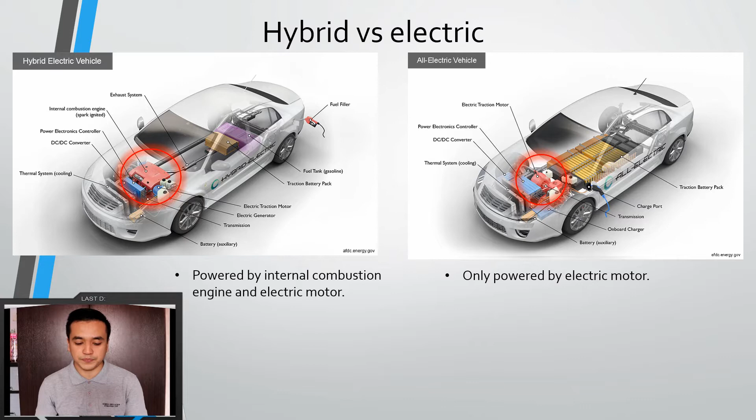So the first difference is that hybrid vehicles are powered by an internal combustion engine and electric motor, while electric vehicles, also known as EV, are only powered by an electric motor, except that the motor of electric vehicles is bigger.

Next thing you may notice is the battery packs. The battery packs of electric vehicles are much bigger compared to the battery packs of hybrid vehicles. These battery packs supply electric power to the electric motor. What's interesting about these battery packs is that the inside contains those similar AA batteries, and there are many of them inside.

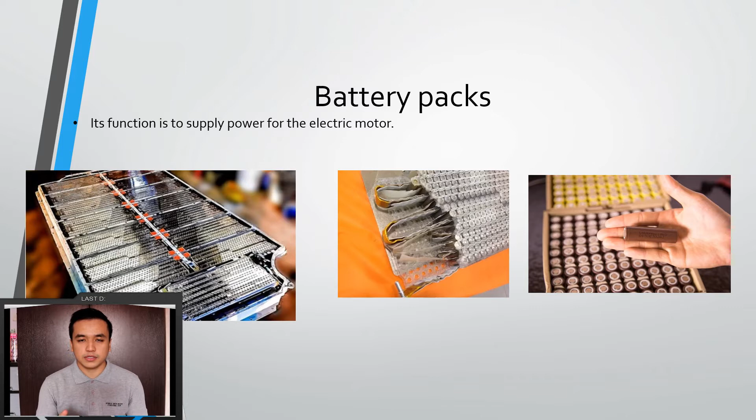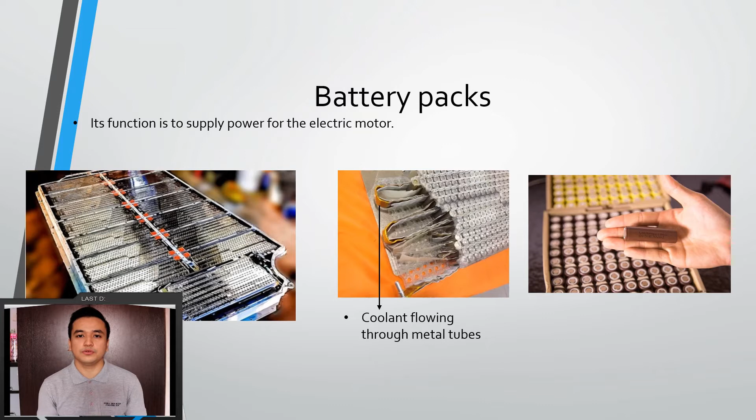This is due to the fact that it needs better cooling. When the electric motor needs power from the battery packs, it generates lots of heat. Therefore, these batteries are smaller for efficient cooling. They are organized in rows, and in between them there is a metal tube for coolant to pass through. This is to cool down the battery each time it generates heat.

So back to the slide. The third thing you may notice is that hybrid vehicles don't have a charging port, which may make you wonder how hybrid vehicles gain power. Well, it gains power by regenerative braking. I will explain that in more detail later. Electric vehicles have a charging port, so they charge the battery directly from the charging port.

And the last thing you may notice is that hybrid vehicles have a fuel filler, while electric vehicles, because they don't have an internal combustion engine, don't need any fuel. At the same time, hybrid vehicles do have exhaust, and electric vehicles do not have exhaust, because there is no internal combustion engine.

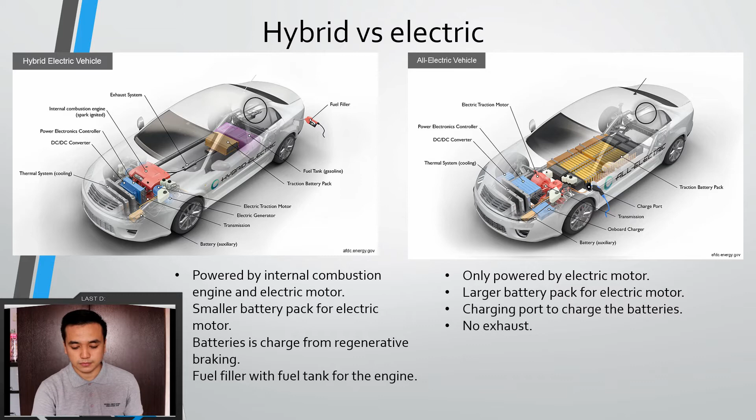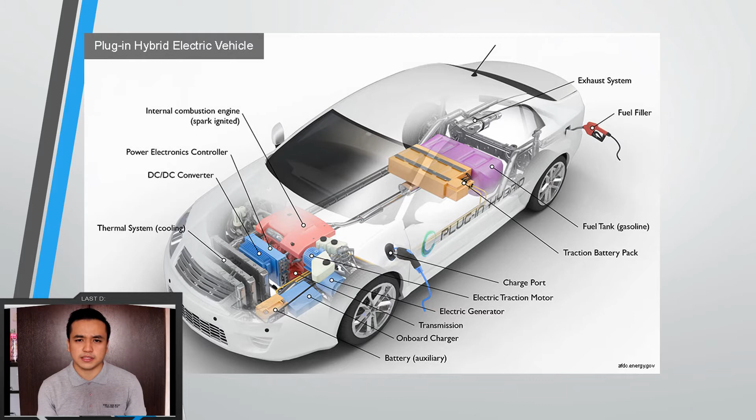So next, I forgot to mention plug-in hybrid vehicles. There are also plug-in hybrid vehicles which are similar to hybrid vehicles, only that they have a charging port to charge the vehicle. That's all.

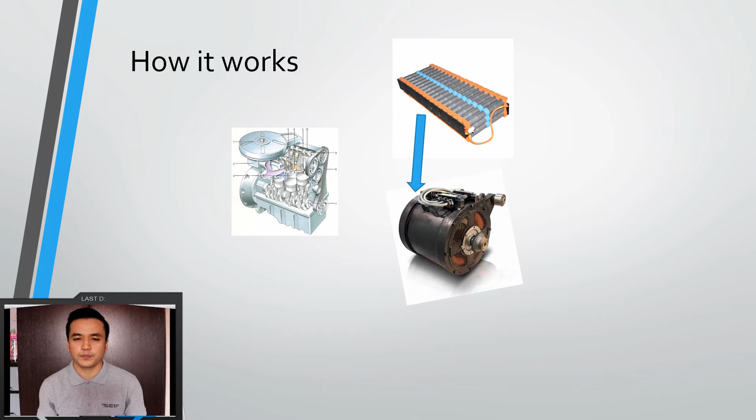So how does a hybrid vehicle work, you might ask? The main components that drive this vehicle are the internal combustion engine, the electric motor, the battery packs to supply power to the electric motor, and the transmission system which drives the wheels. The transmission system is what transfers the mechanical power to drive the wheels.

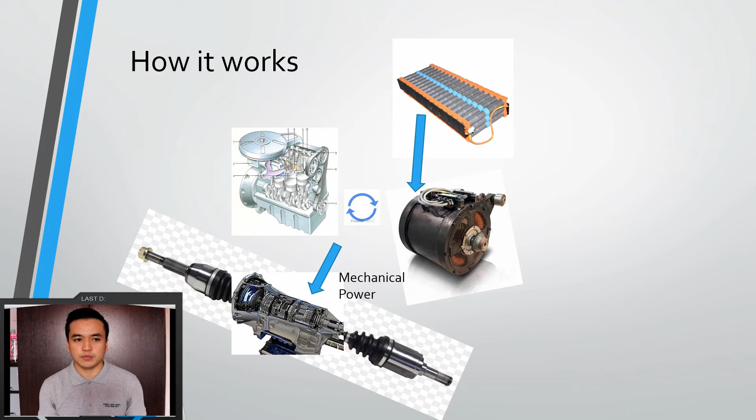So as you may see, there are two power sources. Because there are two power sources, they need to work together. The electric motor and the internal combustion engine need to work together in order to run the vehicle. Therefore, inside a hybrid, there is a computer system that operates all these components together.

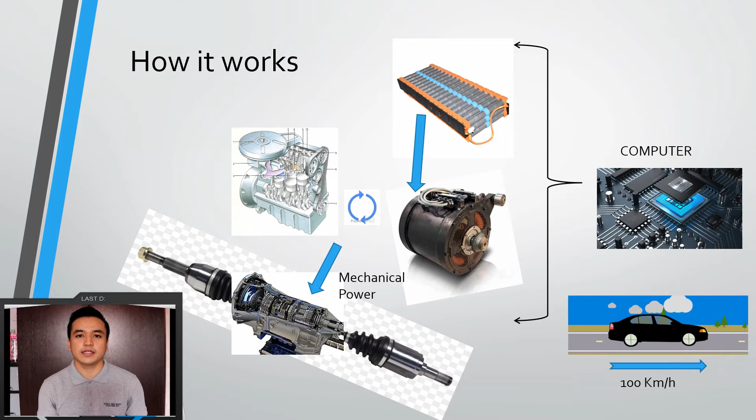For example, if the car were to drive at 100 km per hour, it will first ask the battery packs if they have enough battery to supply the electric motor, and if they do, the internal combustion engine would turn off and the car will run fully on the electric motor. However, if the battery is depleted, then it will turn off the electric motor and run with the internal combustion engine instead.

Another example is when a car has to climb up a hill, and it needs more power.

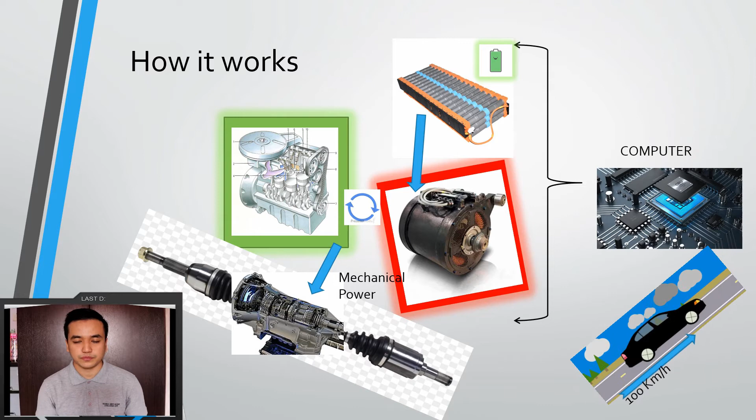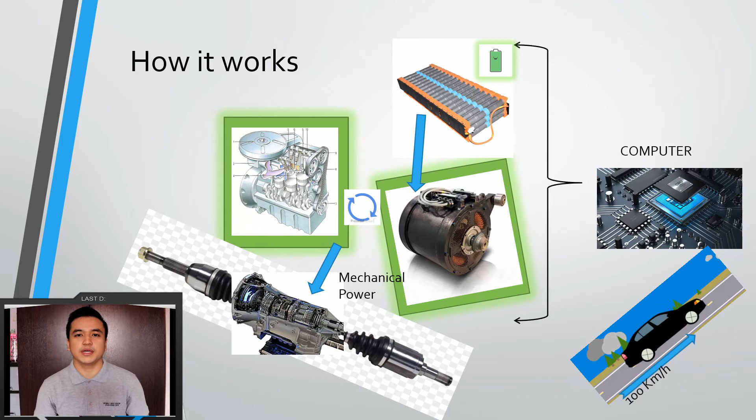So for more power, the computer would turn on both the internal combustion engine and the electric motor to supply power to the car for better acceleration during the climb.

Next, we go to the part of regenerative braking. So what is regenerative braking? To compare first, normal braking generates lots of heat when braking, and the heat just dissipates away. Regenerative braking, on the other hand, transfers the kinetic energy to the battery.

Regenerative braking is the recovery of kinetic energy during braking. So when braking, this energy is recycled to supply power to the electric motor, which eventually creates less heat.

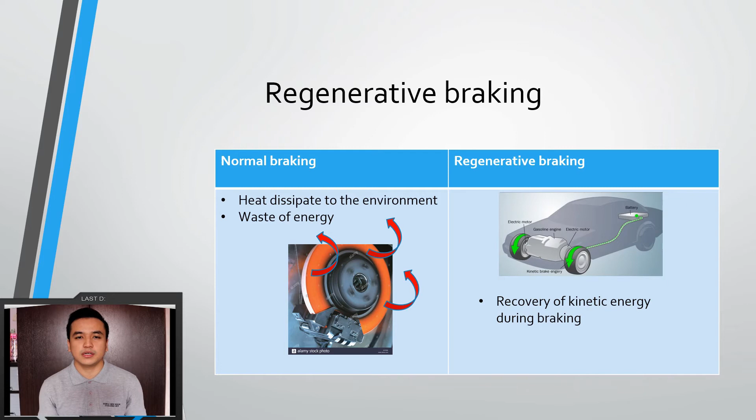The principle of regenerative braking is similar to the working principle of a dynamo. For a dynamo, a torque needs to be applied to supply power to the electric generator. When torque is applied, electricity is generated. The same concept applies to regenerative braking.

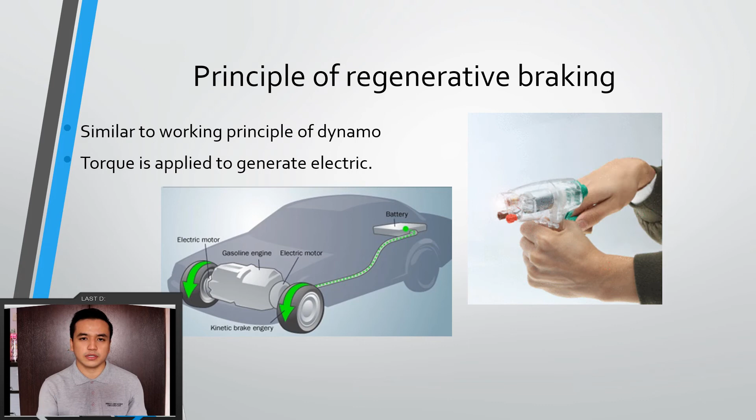The torque is gained from the braking force of the car. The process first starts with the electric motor changing to an electric generator. Then, when brakes are applied, torque is gained, and this torque is used to generate electricity in the electric generator, thus supplying power to the battery to store it.

The battery would then supply the electric motor if needed. However, this principle of regenerative braking only works when the car is driving at fast speed and brakes are applied. If the car is going slow and brakes are applied, a normal conventional brake is used instead.

Therefore, heat is generated only when the normal conventional brake is used. This is why, because of the shortened time of using normal brakes, less heat is generated.

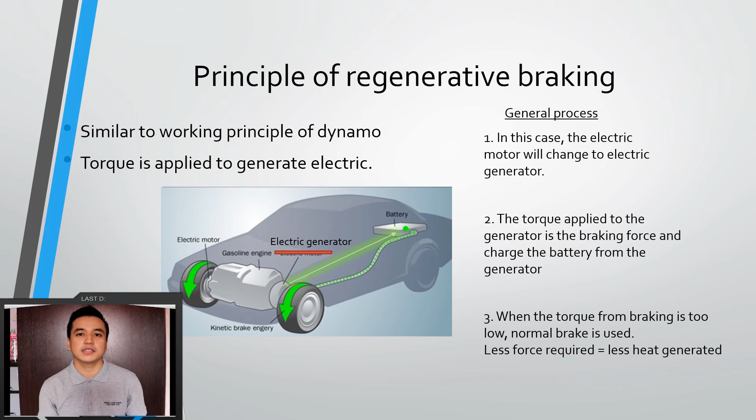So what are the advantages and disadvantages of the hybrid car? First, the advantages are that it is environmentally friendly. This is because of the low fuel consumption, so less carbon is emitted to the outside world, and because of low fuel consumption, the cost to run this vehicle is cheaper compared to a normal vehicle.

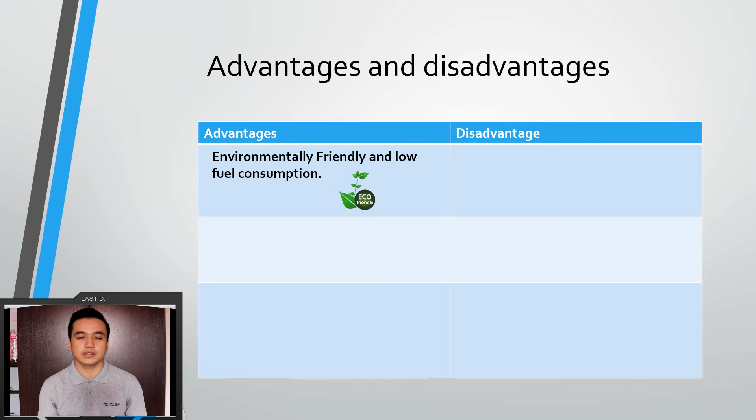Next advantage is that they use a regenerative braking system. Since they use this system, the brakes would eventually last longer because of less heat generated.

The last advantage is that it has a higher resale value because of the technology invested inside the hybrid car. It is expensive, and when we are to sell the car again, the reselling price will still be reasonable.

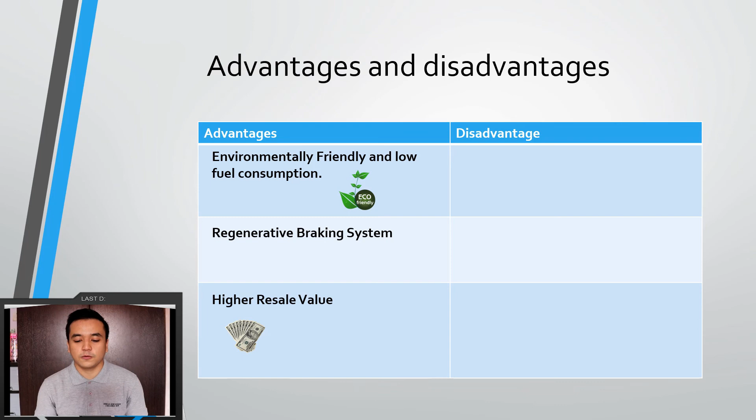Now, because of these advantages, there are also disadvantages. The disadvantage of a hybrid car is that it has a higher maintenance cost. This is because it may be hard to find an expert mechanic who can repair the hybrid car, and it might even cost more.

The next disadvantage of the car is that it is expensive to purchase. However, this is an initial investment. The cost to run it is way cheaper compared to normal vehicles.

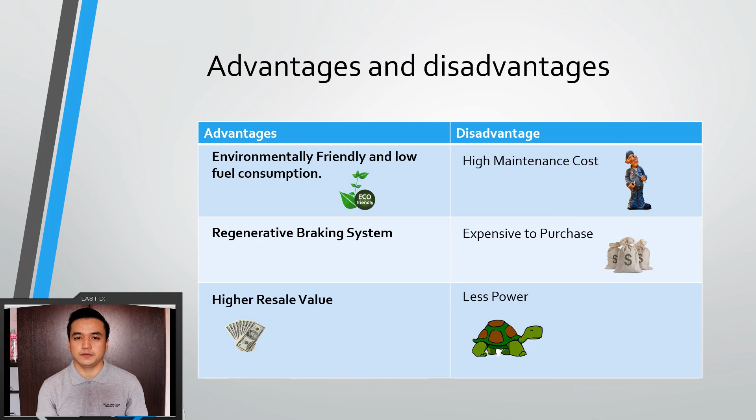The last disadvantage is that it has less power. This is because of the smaller internal combustion engine and smaller electric motor. Therefore, if you were to drive this car for speed, it is not efficient that way.